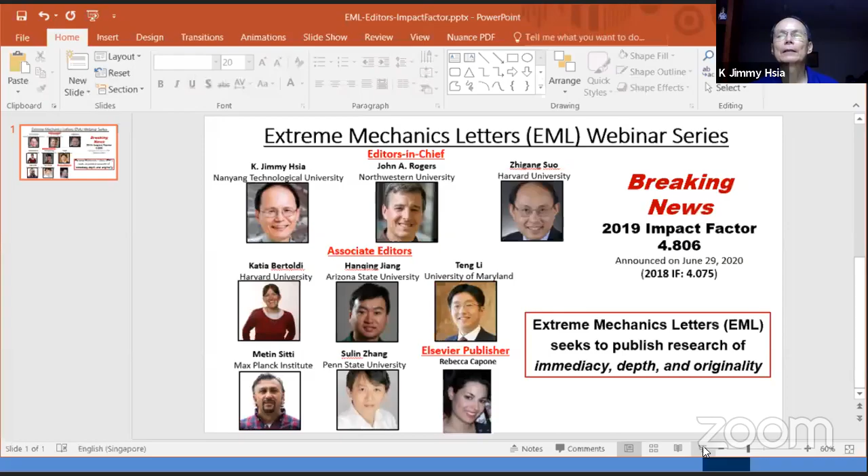I don't know if, is it okay this way? Now it's actually partially showed. How about this? Yeah, this is also zoomed in. Maybe you just go back to the PowerPoint without the print. Yeah, this is good enough. That's good enough. Okay. Thank you all very much.

US Eastern Time. Now, it's my great pleasure to introduce today's speaker, Professor Chiara Daraio, who is currently a professor in mechanical engineering and applied physics at Caltech. Her research focuses on developing new materials with advanced mechanical and sensing properties for applications in robotics, medical devices, and vibration absorption. She received her bachelor degree from Marche Polytechnic University in Italy, and her master and PhD degree from University of California, San Diego. Right upon receiving her PhD in 2006, she joined the faculty of Caltech and was promoted to full professor in 2010. From 2013 to 2016, she joined the ETH Zurich with the chair in mechanics and materials.

She has a long list of recognitions and honors, which includes PECASE award from President Obama, elected as a Sloan Research Fellow, U.S. ONR Young Investigator, U.S. NSF Career Award. In particular, in 2010, she was selected by the Popular Science magazine among the Brilliant 10. And I was reading the Brilliant 10 news post published in 2010 last night, and they called her the sound magician, referring to her research at that time that created bullets using sound waves. And now 10 years later, in 2020, today, the sound magician will talk about the mechanics of robotic matters. Without further ado, here is Professor Chiara Daraio.

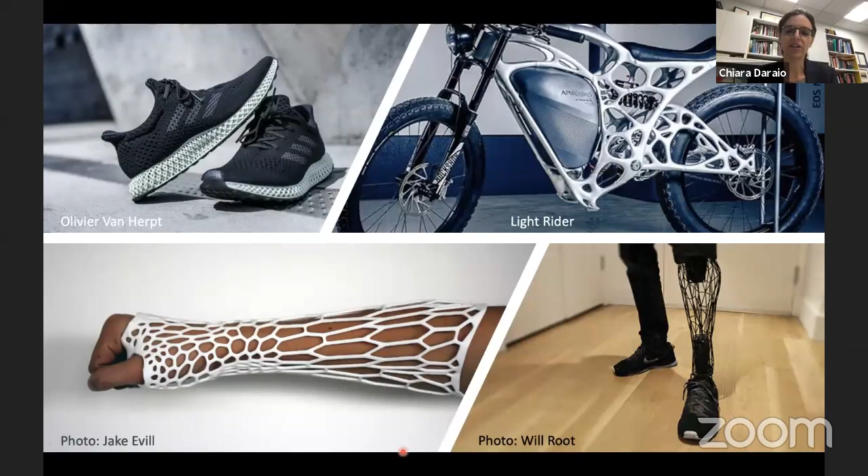Metal 3D printing has enabled even motorcycles, or in the medical fields, there's a lot of expectations arising, for example, for prosthetics and wearable medical support or medical systems. So really 3D printing has been enabling a lot of innovations in technology and manufacturing. So as we have heard, for example, in talks earlier on in the EML seminar series, structured materials are in a way a result of this wide availability of 3D printing and 3D printing different materials from polymeric and hydrogel systems all the way to metal and composite materials.

And if you think about how materials really derive their own properties, we're used to understanding materials and their properties from the fundamental atomic and crystalline structure that depends on the fundamental composition of the elements, characteristics, for example, of solids, while structures, as we know them from civil engineering approaches, really arise and acquire properties from the geometrical distribution of elements like beams and trusses and bars, which are arranged in specific geometrical configurations.

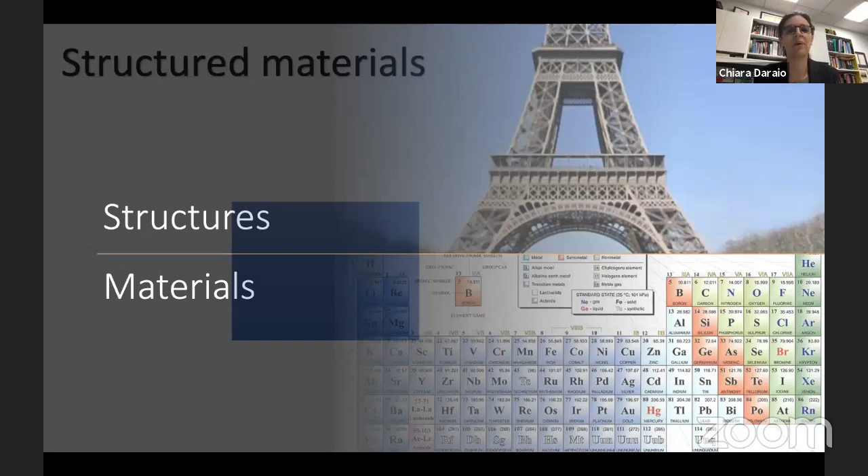And 3D printing, in a way, has blurred this boundary between what we call a structure and what we call a material by introducing or allowing us to think about structured materials, also called architectured materials or metamaterials, which somehow break down this concept of materials as we know them. So usually, especially as mechanicians, we think of a material as a block of continuum that has properties averaged over the volume, for example, density or a certain global stiffness that responds elastically to certain loads. We think of them in a homogenization sense.

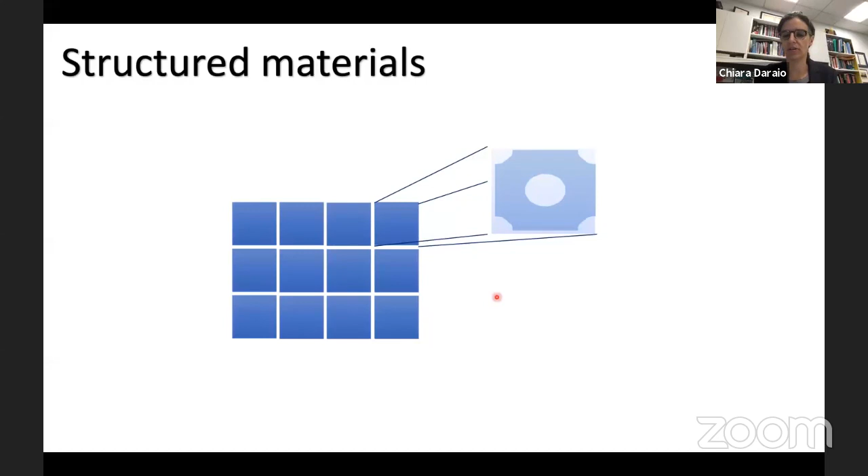And then structured materials are kind of breaking down this intuition by saying, well, instead of looking at the constitutive element, like the crystalline structure, I can look at the mesoscale. And I can use computers, for example, to design this architecture and design the properties by selecting building blocks and homogenizing through the volume. And I think Professor Fleck, for example, gave a wonderful review of those methods in an earlier EML seminar.

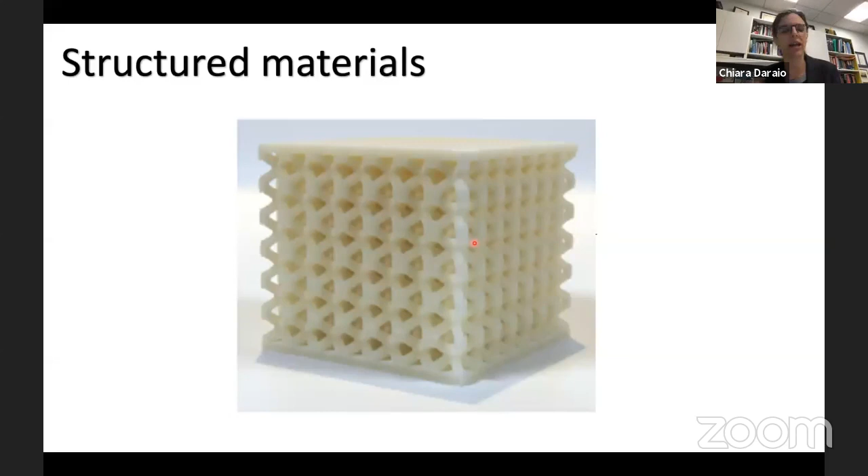So once we have this design, a common practice in the metamaterials or structured materials field is to say, well, we designed one building block and now I can tessellate it in a periodic domain to create what we call the metamaterial or an architected structure, which may have phenomenally new properties, from extreme lightweight and stiffness to negative Poisson's ratio to localized buckling and so on. 3D printing, though, also allows us to expand this to materials that are non-periodic.

And so this was earlier work that I've done in collaboration with Disney and computer graphics colleagues at ETH Zurich, in which the idea of building blocks was used to tessellate objects that have complex shapes, but also added functionalities. So in this case, you can use this idea of architectured materials in selected locations to add functionalities to the same starting material. So you can start from the same polymer.

This is, for example, an armadillo that was 3D printed, or I should say laser sintered, from a polymeric base. And you can see that depending on the choice of architecture in different areas, you can have either a hardened, stiff shell or articulated joints without needing to assemble it, whereas joints and other flexible components would otherwise require either multiple parts or different starting materials. So with this approach, you're expanding the possibilities and functionalities of a single starting material, which enables a lot of applications beyond just the design of toys, as I'm going to show you in a moment.

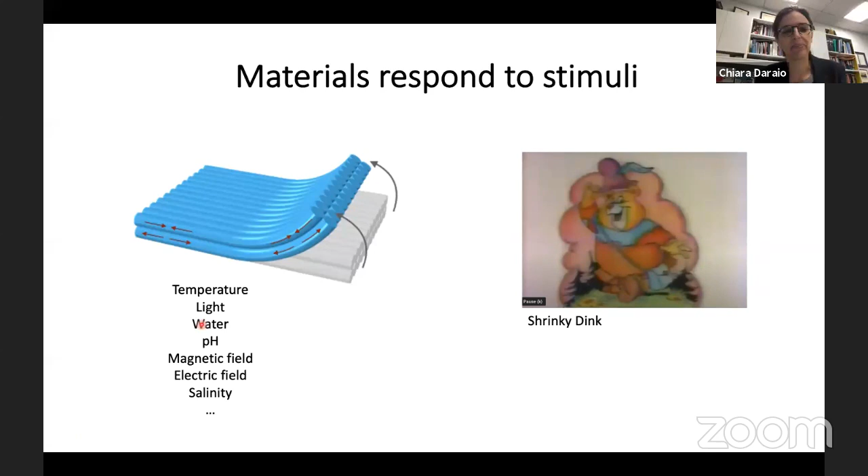There's another thing that I think everybody is very familiar with, but the rest of the seminar is going to hinge on it: we know that materials respond to external stimuli. We're all familiar, even from household examples like Shrinky Dinks, something my kids love to play with, with the fact that materials can deform in response to different external solicitations. That can be temperature, like in the case of the Shrinky Dink you see in this snippet from a really old commercial, where you start from a polymeric flat design, which then curls, deforms and shrinks when placed in an oven.

But materials can also respond similarly to, for example, exposure to light, water, variations of pH, magnetic field, electric field, salinity, and so on. In fact, our chemistry colleagues and chemical engineers have been developing a palette of different materials, both composite materials as well as polymeric structures like hydrogels, that have more and more of these characteristics. So they are able to deform somewhat controllably with different stimuli.

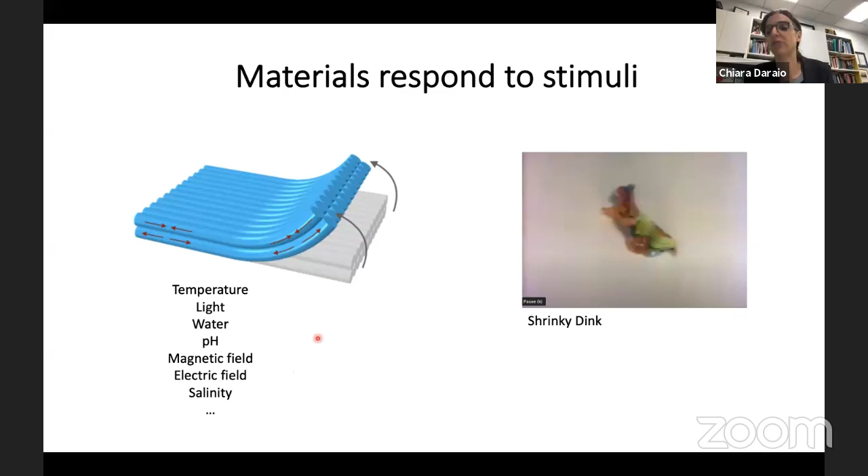So what is this idea of robotic matter? Well, first we should think about what we as engineers understand as a robot. And in general, if you look at the definition of robot, we're thinking of machines that are able to perform a series of complex actions.

So you think of a robot as something that has time controllability, that in time can perform, and that's the concept of a series of actions, and a certain level of complexity, right? So for example, it could be either a grabbing motion or locomotion or so on.

So one of the questions that I've been thinking about in the last few years is what happens when we look at structured materials like the one I just introduced and embed in selected locations of the volume, right? Imagine the armadillo I was showing before. We embed responsive materials that selectively actuate, deform, shrink, bend in response to different external stimuli, temperature, presence of water, salinity, and so on. So if we do that, the question is, can the material be the machine?

So what I mean by that is, can we embed time control? Can we embed logic? Can we embed locomotion without the need for external power supplies, battery packs, sensors? You want all of those components to be in the constitutive property of the architected material itself. So when you think of soft robots, you want to get rid of the rigid battery pack or the tether that limits the motion of a soft robot. But you want to have the armadillo that I showed you before be able, for example, to grab things by itself or move by itself.

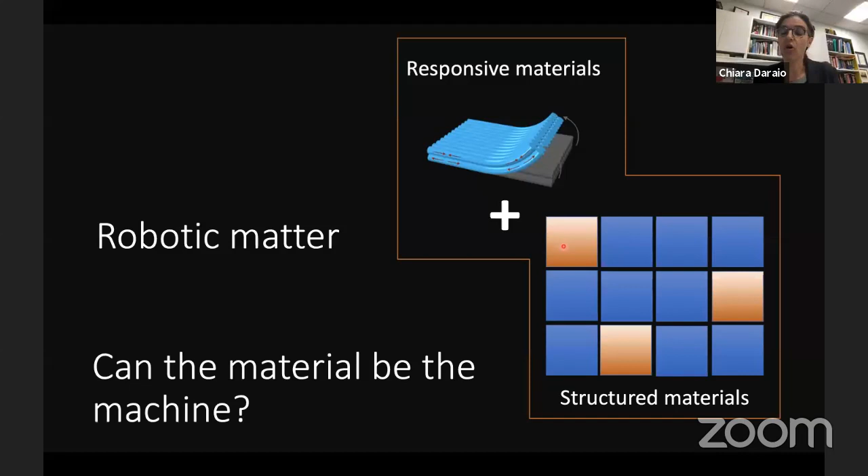So the rest of the talk is going to be focused on three different elements that I think are very important for the realization of robotic matter, or materials that can act as robots or machines. And in general, I'll give examples of each one of them from my own research, but they're by no means conclusive. I think they're just scratching the surface of the potential and the opportunities that mechanics, materials, and in a way, chemistry can enable. So let me start from the first part, which I think is an important element that we need to be paying more attention to, which is the question of design.

If you think of already structured materials, we've been pretty good in terms of inverse optimization to select a certain property. Let's say, in the mechanics sense, we could say, well, I need a geometry or an architecture that has a certain Poisson's ratio and a certain Young's modulus. You can choose density, strength, wave speed, different properties. I just gave you two as an example. If I use this idea of unit cell design, and then I homogenize over a periodic domain, I can use, for example, well-known topology optimization methods to determine the ideal geometry that would give me the properties I need. So that's something we know.

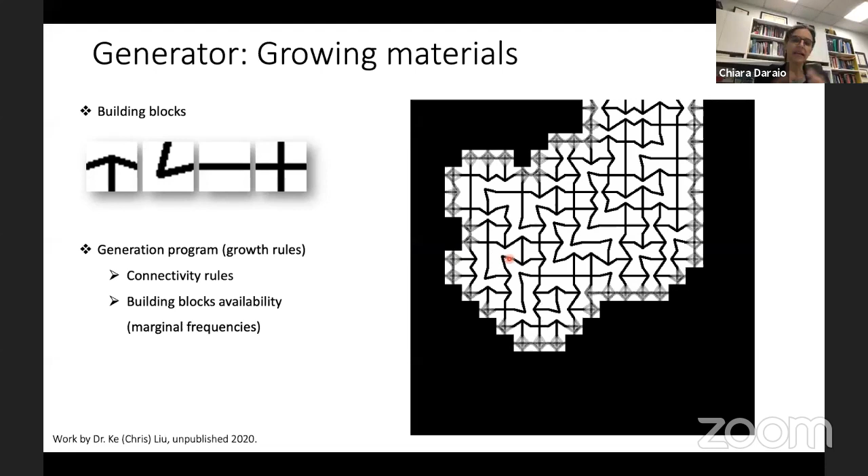And you can provide availability of blocks. So how many bent sections are available for growth, right? How many straight connectors are in percentage available to a material. And then you can let the material propagate a little bit like a cellular automata that can effectively, just following this rule, create several thousands different realizations of geometries, patterns, and textures that then we can either 3D print or evaluate in this generative loop that I was showing before, using conventional methods well known to mechanicians like finite element, right?

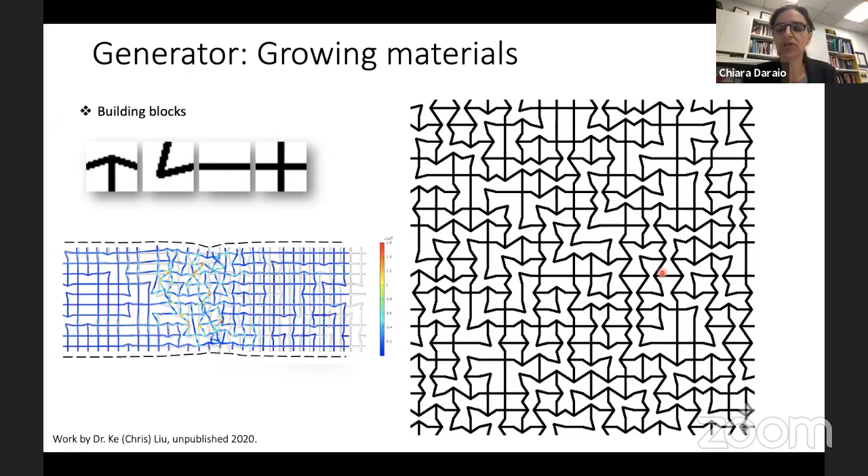And so in that way, we can basically have this virtual lab that starts designing and storing ever-growing, larger and larger databases of building blocks that defy, in a way, the common intuitions, but allow us to explore a larger parameter space. They also allow us to understand the fundamental rules of mechanics, right? To say, how do I design, for example, for higher Young's moduli or lower negative values of Poisson's ratio?

And varying the availability of the different building blocks, for example, how many elbow connections, how many crossbars, or how many T-shaped connections you give the computer for generation, you see that you can bias basically this growth towards properties you want. So it's not just a black box optimization, but it's an educated growth of materials towards the properties that we need, for example, for specific deformations or properties desired.

And I gave you examples earlier on in 2D, but what Chris is doing now is to expand this idea for designs of three-dimensional objects and three-dimensional building blocks that have a relatively complex architecture, but intriguing mechanical and deformation properties. So that is to say, we need to think out of the box in terms of having new design tools that are available to us to generate deformation patterns that are interesting for applications that, for example, will evolve, as I'll show you in a moment, towards robotic matter.

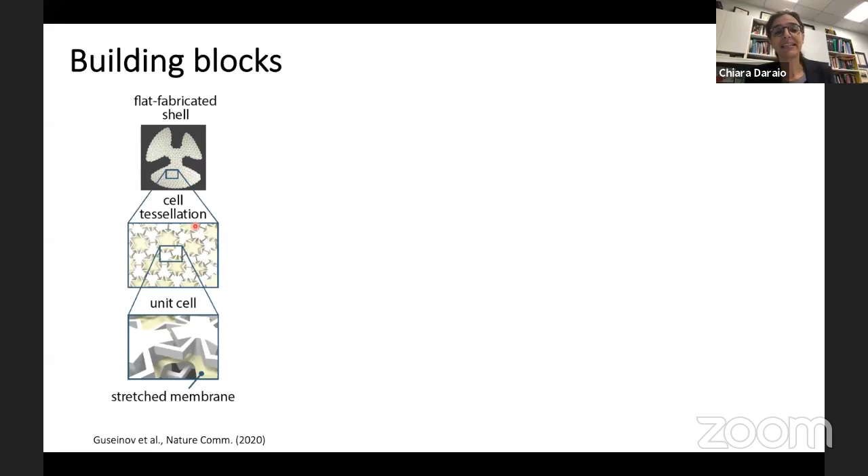So how did we do that? The conventional design via homogenization in this case would not be sufficient because you really do need to have spatial variations and different properties in different areas. We basically fabricated a flat shell which has a tessellation of unit cells that are all different. And the fundamental building blocks of this unit cell that you see here, for example, in white, are reported in green on the central part of the slide. They have really three fundamental elements that are essential to the design.

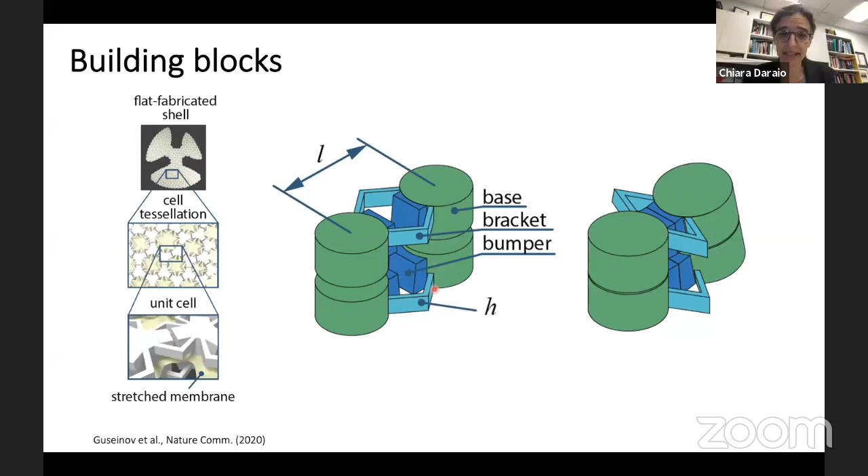A base, which functions as a fundamental structural support element. A bracket, which controls the time actuation, and bumpers, which through contact control the geometry of the final shape, or if you want, the curvature of the morphed structure. You can see that the bracket has this H, which is a thickness, which is going to be the temporal control.

So how do we do things? Well, once we have these designs of these three elements, we can control the morphing time by varying the thickness H of this bracket. You can imagine that if, for example, temperature was your trigger, simply by diffusion processes, the time of actuation through temperature of thicker brackets is expected to be slower than the time it takes to actuate very thin and easy to bend brackets. And the global curvature comes from the assembly of these local bumpers, which control basically the contact mechanics at certain points.

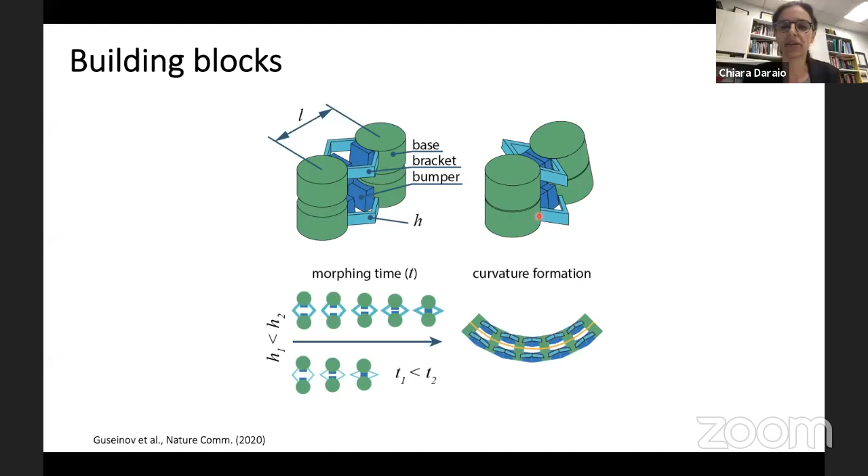So again, how do you design for complex shapes? Well, in this case, we borrowed from computer graphics again and looked at conformal mapping as an approach for design, in which we determined a certain target surface. We use an isotropic triangulation, much like what you use in finite element for creating discrete components in an actuated stencil. We flattened it, just like you do in a world map, if you want, from a 3D object to 2D.

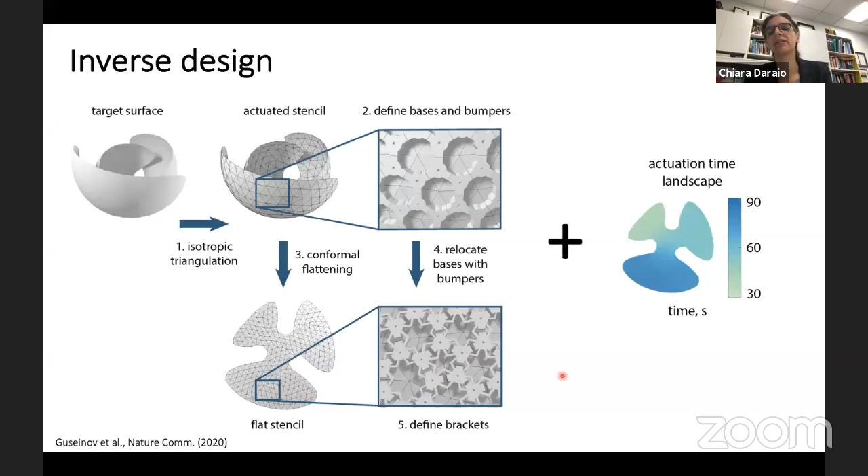And then we defined bases and bumpers, so the location of these springs and structural elements, as the center of this triangulated point. Once you follow the conformal flattening, you can relocate the bases and bumpers to create basically these bracket arrangements that give us the flattened sheet of architected materials. So one thing that's missing here is the actuation landscape. Now we know what we want to move first, and so we can change the thickness of this bracket based on when we want the actuation to occur. And that gives us basically the full design.

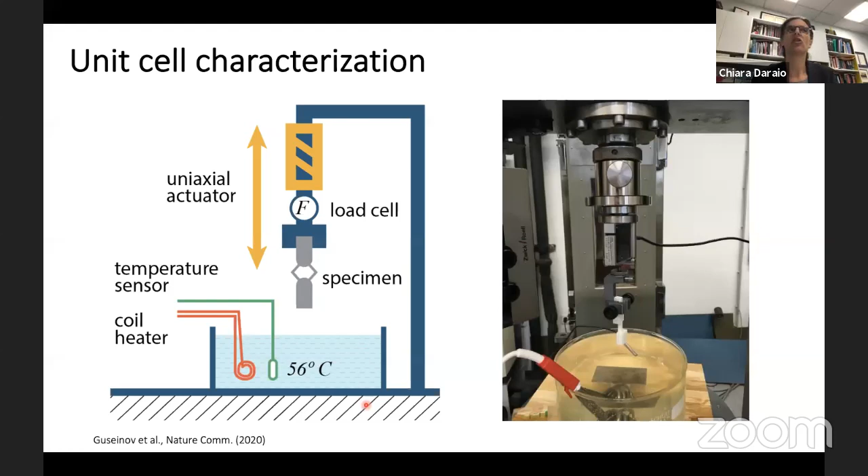But how do we know how fast and how strong these brackets are? Well, again, we went for a data-driven campaign where the students involved in this project were effectively measuring a large number of specimens with different geometry, bracket thickness, bracket lengths, different loads applied, and so on, in a bath of fixed temperature. And by collecting this data and storing a lot of these displacement time curves of deformation at different applied loads, we could construct a data-driven model, so basically fit the experimental data to a numerical model that then was able to be fed into a simulation framework.

Now, the simulation framework is a discrete simulation framework which combined a finite element approach for the membrane with localized springs, for example, longitudinal springs and shear resisting springs for controlling basically the deformation motion of the brackets.

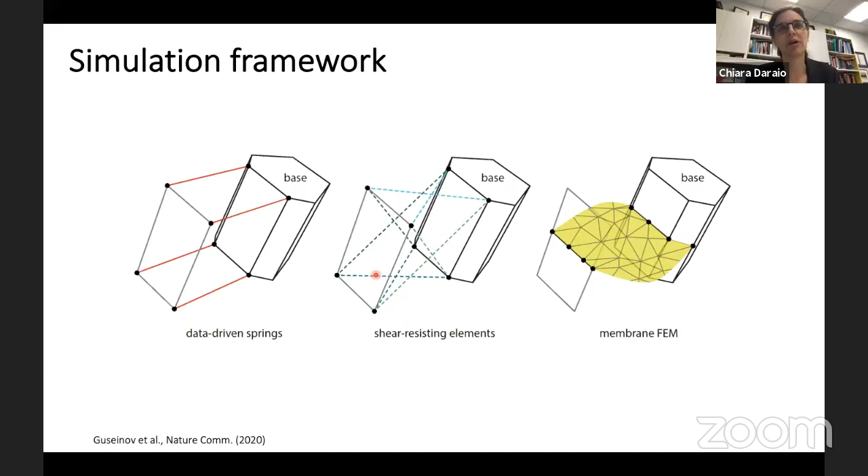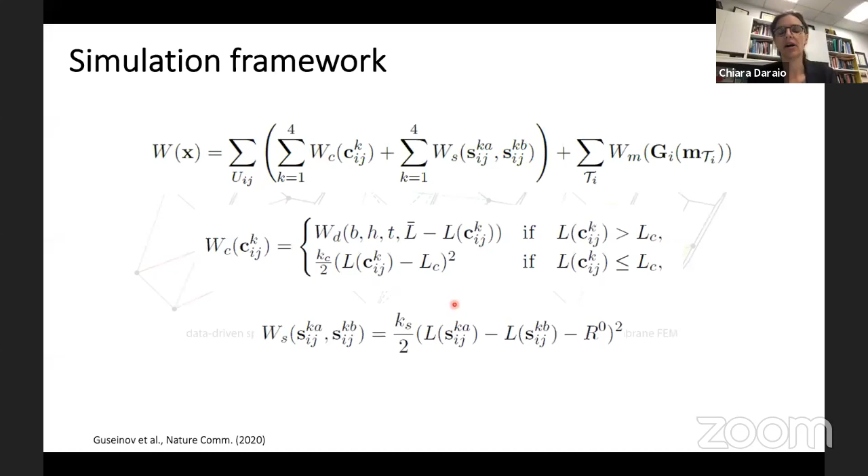And in this discrete simulation framework, we could look at the potential energy of each one of these springs, the compressive springs, the shear springs, the membrane springs, and feed into them the data-driven models that were derived from experiments, and effectively determine the deformation patterns that then would guide the overall simulations to determine the time-dependent response. And so I'll give you some examples of what came out.

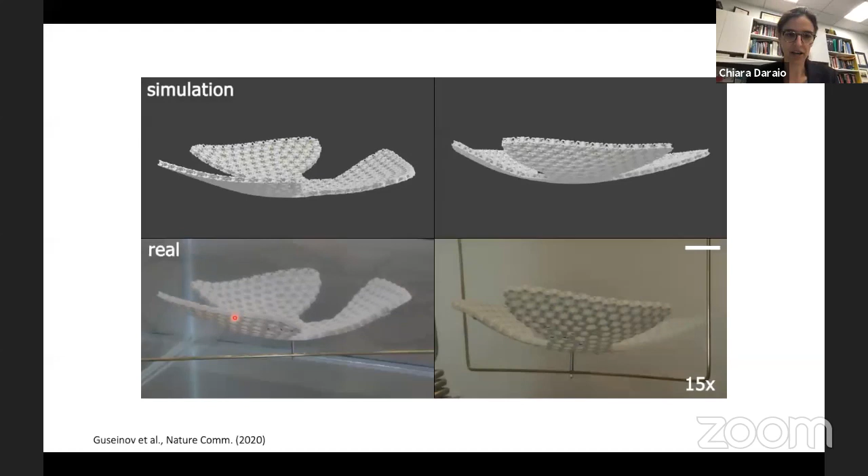This is another petal structure in which the petals are all interpenetrating one another. And you can see that this was the target configuration. In the top, you see the simulations, and the bottom is the experiments. These are done in water at about 60 degrees. We are using a 3D printer. This is the Connex 500 printers from Stratasys. And you can see that each one of these elements contains the bracket, and that indeed we were able to fabricate the shape we initially wanted.

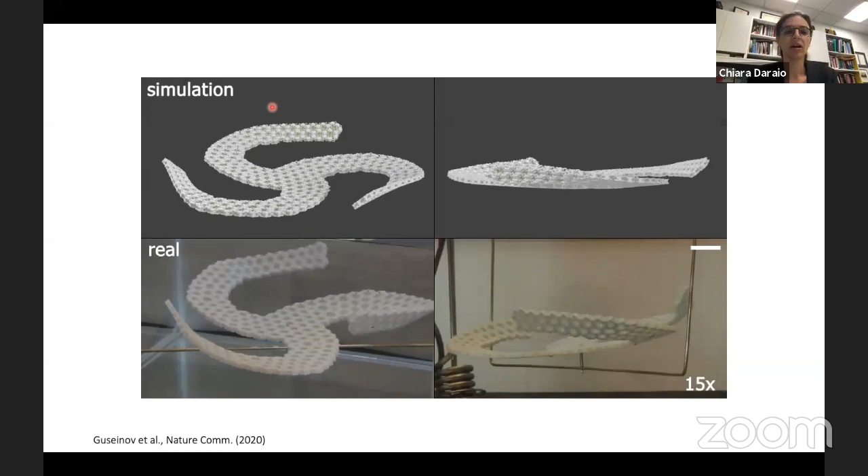But the lotus leaf was something that was shown before. So we asked ourselves, well, can we make more complex shapes? For example, can we have ribbons that self-knot? In this case, we called it a self-interweaving shape, which is a lot more complex because the time of actuation really needs to be spot on in order to avoid collisions in the knotting. And you can see that once again, here's the simulations, and below you see the experiments. You can see that the three ribbons are actuated in different places at different times, and we were indeed able to show interwoven architectures. So this is a time-dependent actuation, but it's still not complex action.

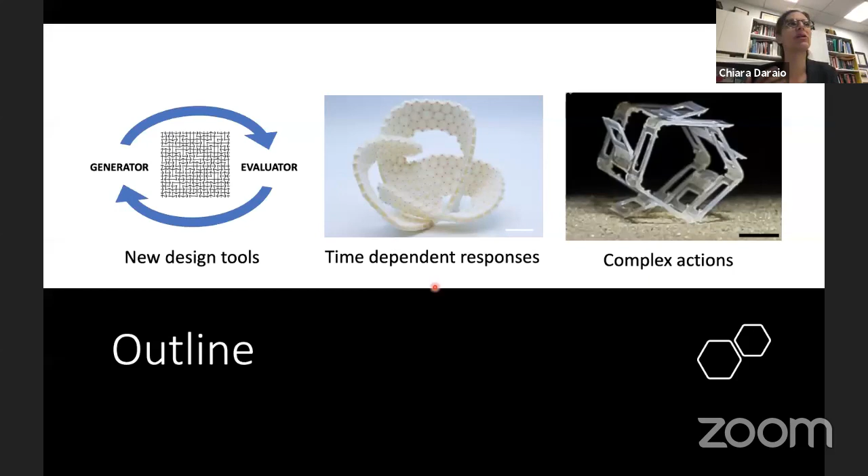I think in this case, although we have shown the ability to embed a time-dependent response on an architected material, which responds in this case to temperature stimuli, it's still not a robot the way we think of it. It's still just a shape morphing sheet. So the question is, can we make it even more complex? Can we embed this complex action that would make us think of a material as a machine?

And so the first attempt to doing this again went to shape memory polymers, and uses a lot of ideas similar to the ones that I showed you before. But in this case, we were aiming to obtain propulsion. So we wanted something that would move, that would locomote somewhere. For motion, shape morphing is maybe not enough. So we wanted something that would amplify strain, and we had to look at building blocks or springs that had the ability to amplify deformations rapidly.

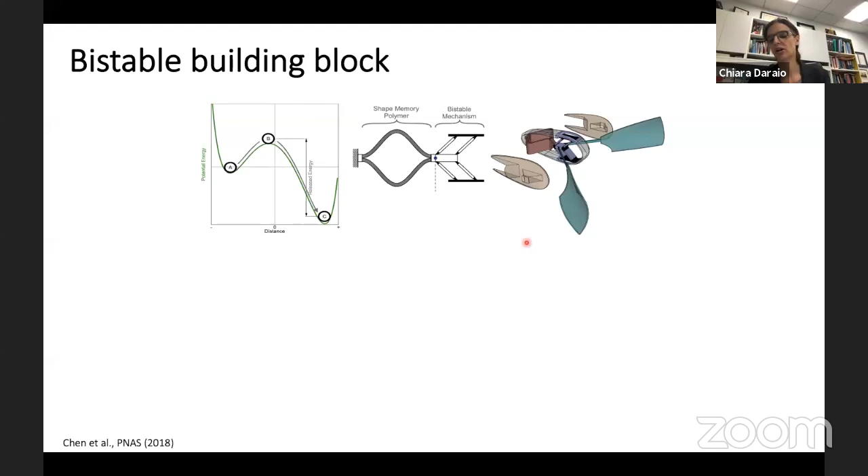So we added to this bistable mechanism a shape memory polymer actuator, like the brackets you've seen in the prior example. And then to this unit cell, we attached three elements. This is an exploded view for convenience, but this element is 3D printed in one go without assembly. So you see the bistable element here, the shape memory brackets here, and then we're adding paddles in the front and floating elements for buoyancy. And so this is the unit cell once built.

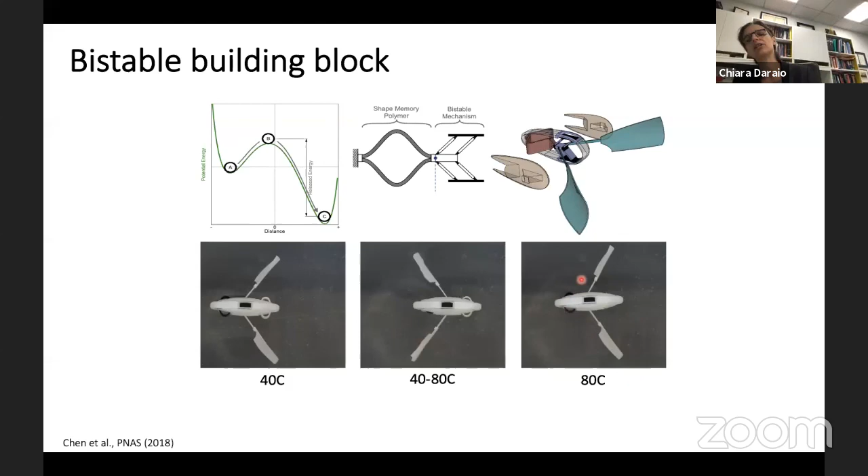You can see it in a bath of water, it's floating, and as we keep the water at a relatively cold temperature, the element is in A configuration. As the temperature is increased, we're effectively using temperature to provide this hump in potential energy. And then finally, it triggers the bistable mechanism, which is effectively a swimming motion of the paddles in the front. And you see the little floater propelling forward. We can then reload by using a different actuating spring. There's a white one and a black one, which has a different actuation temperature and will reload the mechanism to the starting position.

So how do we control the responses in time? Once again, by using these brackets that change thickness.

And you can see here, oh, the movie just stopped, let me see. You can see here that as you immerse in the bath of constant temperature water, the movie is going to play again. The brackets are going to trigger at different times. Oh, this is not collaborating with me.

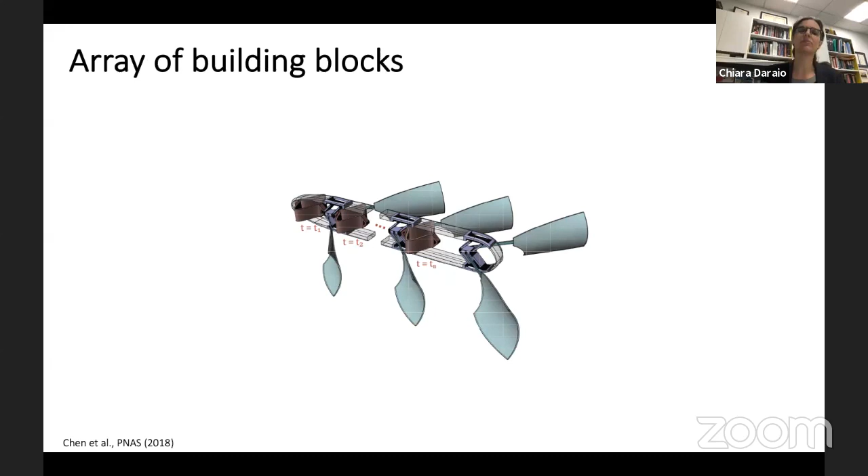Now, once you have these building blocks, you can, of course, tile them into arrays and create swimmers that have, for example, multiple paddles. And in this movie, you should be able to see the actuation of two paddles that are triggered at different times. So you're going to see first the back paddles pushing the swimmer forward, and then the second paddle. And you can add as many as you like to create basically a swimming millipede.

Or you could create defects like the ones you see on this image, in which some missing paddles would cause the swimmer to, for example, first go forward and then veer or steer up or zigzag around certain objects. We also wanted to show complex functionality to say, well, what if I can do more than just go forward? And so we wanted to design a swimmer that can do three things.

It can start from a parking position, swim to a target position, and then release a cargo, like a sensor. In this case, it's just a little Caltech penny-sized logo, and then go back to its initial parking position. So what you're going to see here is, in fact, that there are two springs. One is going to trigger the motion forward, then the cargo will be deployed.

And then, okay, this is a bit of a real-time slow motion movie, so I'll jump forward. You will see the second spring trigger that will allow the swimmer to go back into its parking position. So we thought, okay, this is a first example of a piece of material that's 3D printed in one go, no assembly, no batteries, no nothing, that can do a series of complex actions.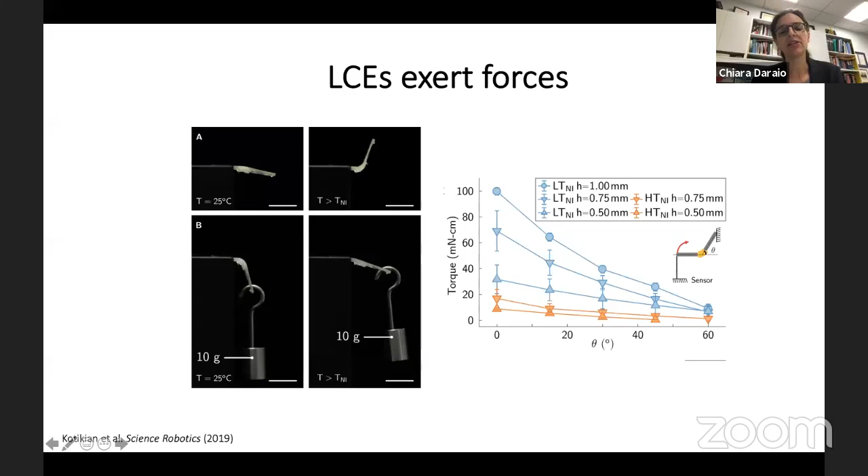So these LCE hinges also can exert forces, and we measure that a bit like a weightlifter, straightening the hinge and letting the hinge lift different weights for a large number of cycles. And you can see, for example, the torque applied as a function of the bending angle in these measured values.

And then, and here is the key, is the question of adding this architectured material that I was mentioning at the beginning with local stimuli responsive materials. And here you look at the architecture as follows. You can see that there are 3 different materials in this flat sheet. There is the gray part that you see also here, which represents the passive structural element. That's the rigid polymer that's printed and does not respond to external stimuli.

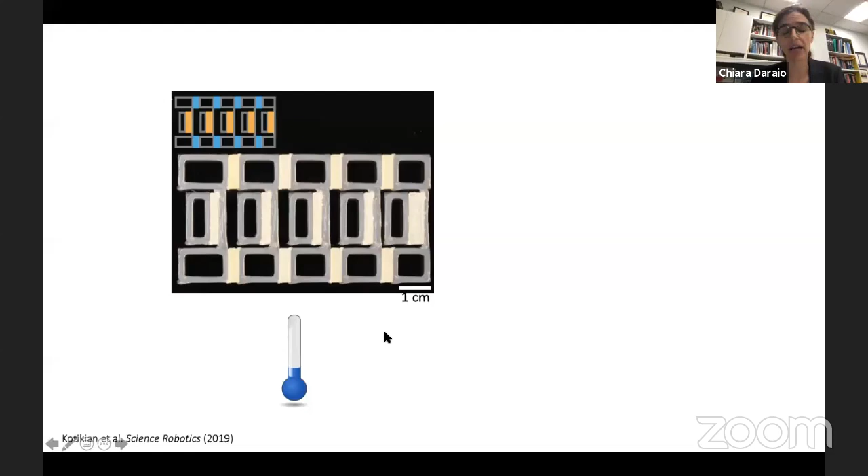Then you see these blue and orange areas that you see here and here, which are liquid crystal elastomer hinges that respond to different temperatures. And you can see that we use one for the side branch and for the side lobes, and the other for the middle part. So when this sheet is cold at room temperature on a table, it remains flat. But when the temperature is increased, it rolls up a bit like a roly-poly and morphs into a different shape.

But let's see it all together. So what you're looking at now is a side view of this polymeric sheet. And this is a hot plate onto which the sheet is going to be deposited. So I'm going to play the movie and you're going to see what happens. This is slightly sped up. I think it's 4 times.

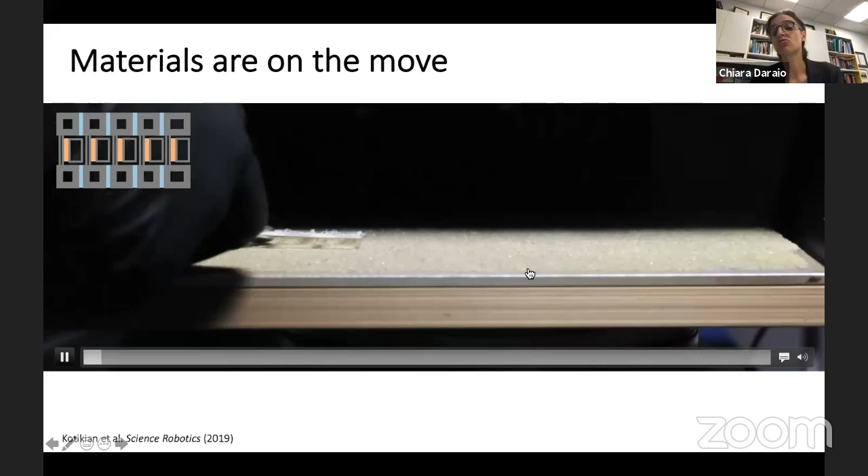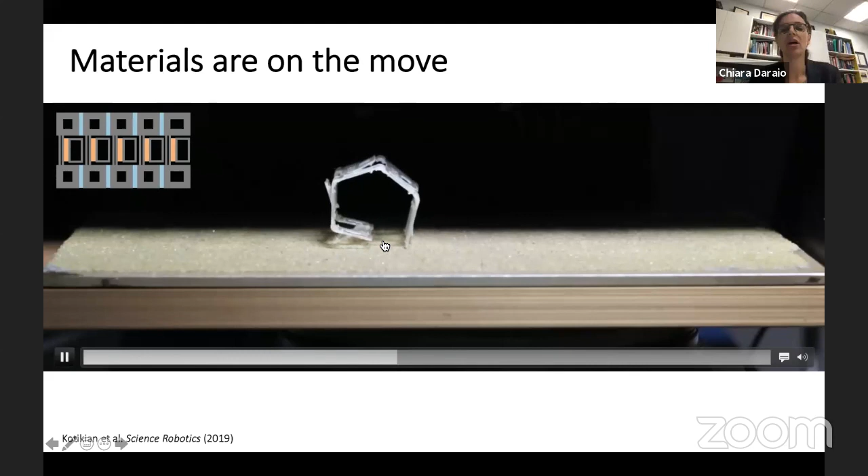So you see that first the blue LCEs respond and curl up into the roly-poly. And then slowly and steadily, the orange LCE or these other linkages here are actuated so that this object keeps rolling. Now, why does the object keep rolling? There is a clever mechanism in this case: you have a hot surface here, but the air up here is at room temperature. So although you can see these little flappers that look like little legs are actuated, once these little legs reach the top, they cool and hence they fold back.

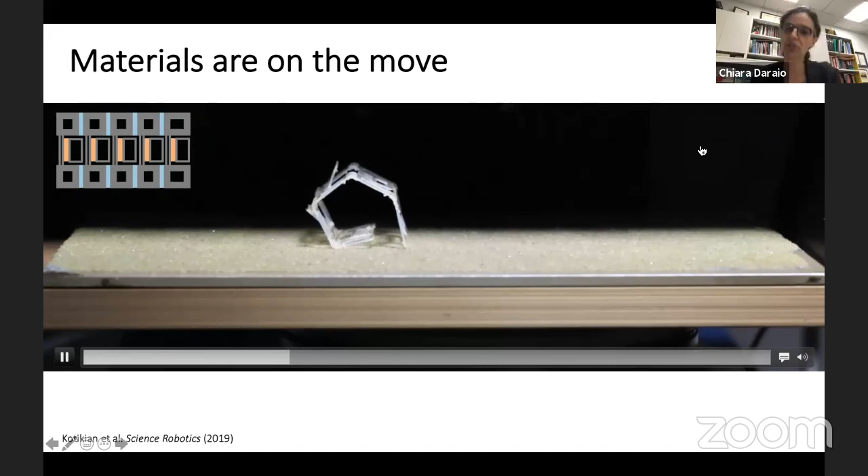And this enables this rotation or continuous motion that will perpetuate as long as this differential temperature between the hot plate and the room above is maintained. So in a way, you have a polymer that can move itself to different locations.

So what are the applications of these kinds of examples? And I feel like these examples I just showed are just scratching the surface of what's possible, because in a way, we have only used the response to temperature, right? So in this case that I just showed you of the roly-poly, of the swimmer, but we've also created, for example, solar panels that actuate in response to temperature and open up and close up like a flower. But I think the question here is that we're still stuck to temperature stimuli.

Now, just imagine including in these architected materials other responsive polymers like hydrogels that swell when wet, or hydrogels that shrink when the pH is changed, or materials that, for example, respond to external magnetic fields and so on. You can now enable not just shape morphing and locomotion, which is what I showed, but also embedded logic by effectively pre-programming the materials to say, if wet and hot, swim, else, for example, hop.

And I think there are a lot of opportunities for materials that embed this type of functionality that span different fields of engineering, from medical devices. Imagine deployable robots that can navigate through the intestine, for example, deploy certain grippers when pH is at a certain level, and then release drugs when the temperature is at another level. So I would say there's a lot of opportunities for these kinds of robotic matter in medicine, but of course also in space applications.